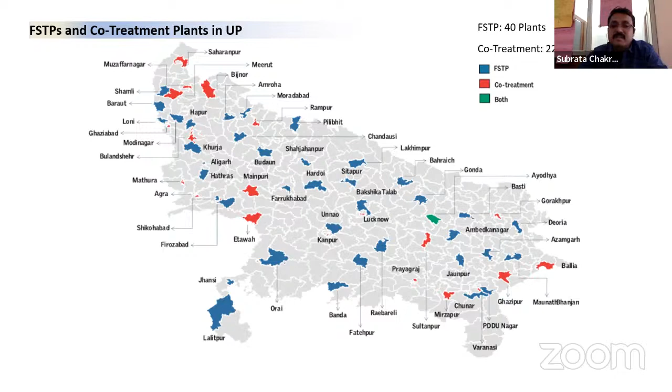Now, handover is an important aspect because AMRUT only funds the CapEx and a limited period of OpEx. Once this OpEx period is over, the plant is supposed to be handed over to the ULBs. We have an issue here because lots of cities are expecting guidance from the state, and the state is supposed to provide necessary guidance and a checklist on how to take this handover, because AMRUT provides funds to the Jal Nigam.

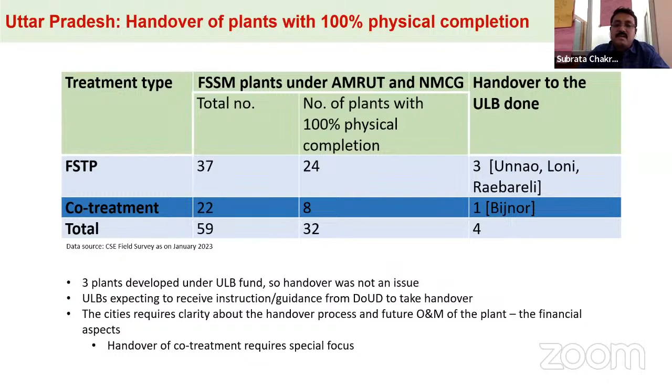Jal Nigam provides the construction through engagement of a contractor, and once this plant is built and operational for a certain time, it is supposed to be handed over to the ULBs. Now ULBs have to take care of the entire operation and maintenance of the plants. Out of 37 FSTPs, 3 have been handed over. This is January 2023 data; in between, some handover might have taken place, and out of the co-treatment plants, 1 has been handed over.

Next, distance: the plants have come up at various parts of the cities, at various distances. In less than 10-kilometer distance, there are 11 FSTPs and 6 co-treatment plants. Between 10 to 15-kilometer distance, there are 23 FSTPs and 11 co-treatment plants. And there are 5 FSTPs and 4 co-treatment plants at a distance of 15 to 20 kilometers. This is creating a problem.

The long distance of the plant from the city is creating a problem because private desludgers are not willing to take the sludge from households to the long-distanced plants. For all these cities within the 15 to 20-kilometer distance, the 5 FSTPs and 4 co-treatment plants need special care. We need to understand what the cities are doing there and how this can be managed.

Next, approach road is also an important part because all-weather roads are important to take the sludge to the FSTPs. There are small stretches, maybe 500 meters or 1 kilometer, of road that are yet to be built. We found good condition roads in 18 FSTPs and 13 co-treatment plants, which is 31 plants, so 31 out of 62, or 50% of plants.

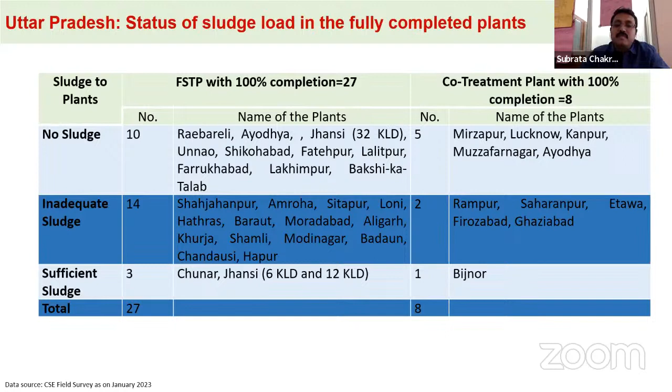So that's why we were saying sludge is the major challenge. For bringing sludge to the plant, one factor is distance, which we cannot change, but we can create a conducive environment by taking care of the approach road condition.

Now for the sustainability of the plants, what are the things important for the cities? Whether we have city level committees—because in UP the entire administration is heavily dependent on the executive officer or commissioner of the city—whether we can create a committee at the city level.

This committee will help in all sanitation related activities and also FSSM related activities. Many of the cities do not have bylaws. FSSM bylaws create a regulatory framework at the city level. Whether and how this is helping in 3 cities—Bijnor, Jhansi and Chunar—we can understand that.

And also, what can be done to ensure that adequate sludge comes to the plant? What are the various desludging models in towns?

Some of the towns have private desludgers only. Some have only government desludging machinery. And some towns have both private and government desludging machineries. So how can a model be created?

And who will be paying for this? Whether government will be paying the private desludgers, or households would be directly paying the private desludgers. What is the model? And how can citizens be engaged with the FSSM project, and what is the importance of that?

Because much of our effort goes into creation of infrastructure, but many times we forget creation of a conducive environment, engaging the citizen in the process.

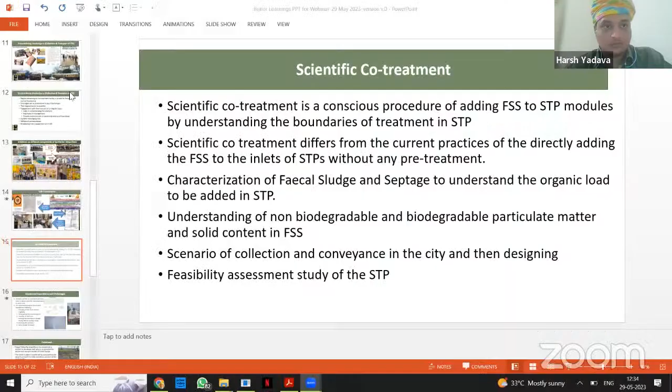Hi everyone, I hope my screen is visible to you all. Yeah, sure, Harsh.

So, hi everyone, I'm Harsh Yadava. I'm an employee of Center for Science and Environment, and I'm located in a city called Bijnor in West Uttar Pradesh. The city is a small city which is very close to the Ganga River.

Today I'll be sharing the experience of Bijnor city in dealing with fecal sludge and septage management. The idea was to implement fecal sludge and septage management in line with the City Sanitation Plan, which was prepared by CSE and endorsed by the Nagarpalika Parishad.

In my presentation, I'll share the city profile, what infrastructure was created to treat fecal sludge and septage, how interventions were done on various aspects of the sanitation value chain—containment, emptying, transport, and treatment—and what basic things were done to create an environment supporting the practice of fecal sludge and septage management.

And then why these desludgers are important, what roles they are doing in the sanitation value chain, and what are the current operational challenges at the plant, or what remedies or rectifications we have done in the city to improve on that.

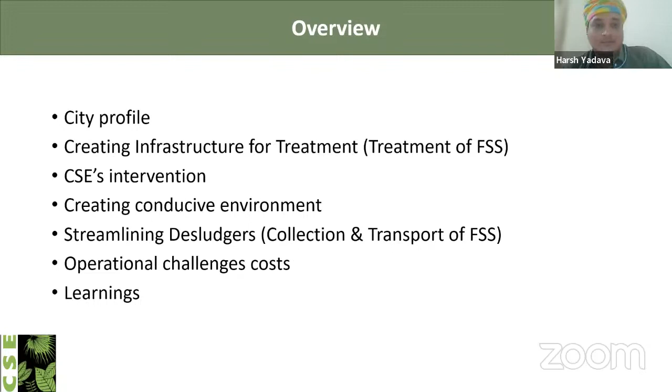The city is 12 kilometers west from River Ganga, and it's around 236 meters above sea level. The city achieved ODF status in 2018, ODF plus status in 2020, and ODF plus plus in 2021.

The city has a 24 MLD sewage treatment plant based on upflow anaerobic sludge blanket reactor, and it is receiving around 20 to 22 MLD of municipal sewage at the moment. On the premises of the 24 MLD STP, there is a 20 KLD co-treatment unit, which is receiving around 6 to 8 kiloliters of fecal sludge every day.

The city's population, according to the 2011 census, was around 93,000, but it has now increased as the city expanded its boundaries, going into Seema Vistar in 2020. So according to 2011 data adjusted, the current population is around 178,000, but if estimated properly, it's over 2 lakh. The area has increased from 3.6 square kilometers to 11.61 square kilometers.

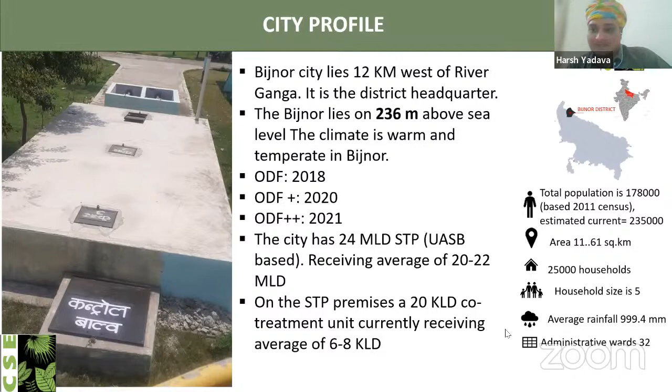Around 25,000 households are present in the total expanded area. Average household size is around 5 persons per household.

Talking about the treatment infrastructure, we have this co-treatment unit, which was constructed and commissioned in 2022. The total expenditure was around 41 to 42 lakhs. It is the first plant completely funded by Namami Gange to showcase how co-treatment can be done. The executing agency was the Uttar Pradesh Projects Corporation Limited, and technical support was provided by Center for Science and Environment.

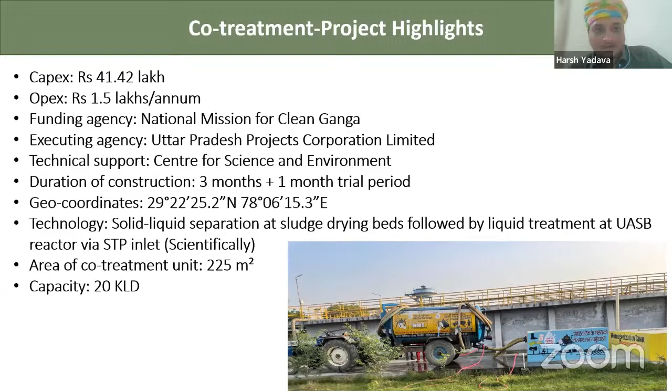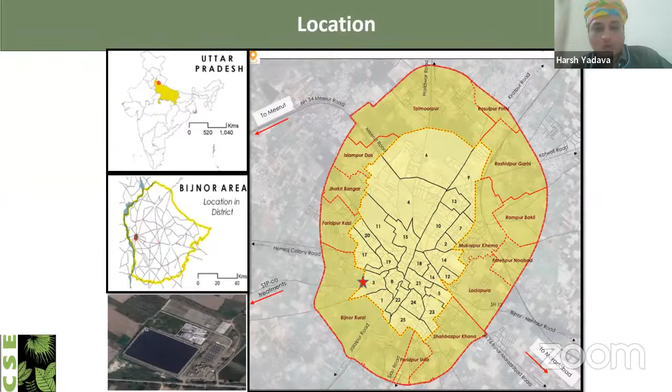It's around 1.5 to 2 kilometers from the city boundaries, in a village nearby.

The process for treatment of fecal sludge at the moment, introduced on the premises of the sewage treatment plant, works in this particular way. We have introduced the homogenization tank here, and fecal sludge is decanted at a screen chamber, from where it is transferred to the homogenization tank, where it is stored for 24 hours retention time, and then transferred to the sludge drying bed.

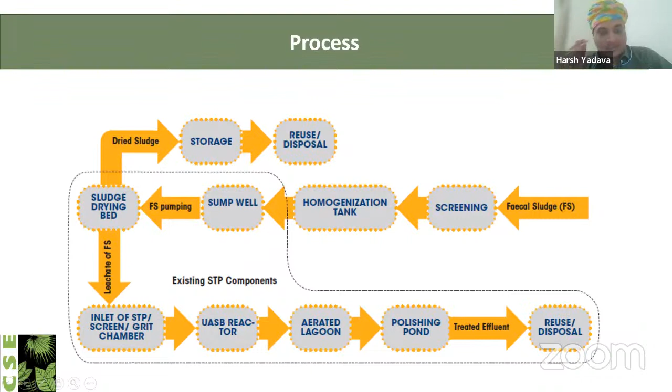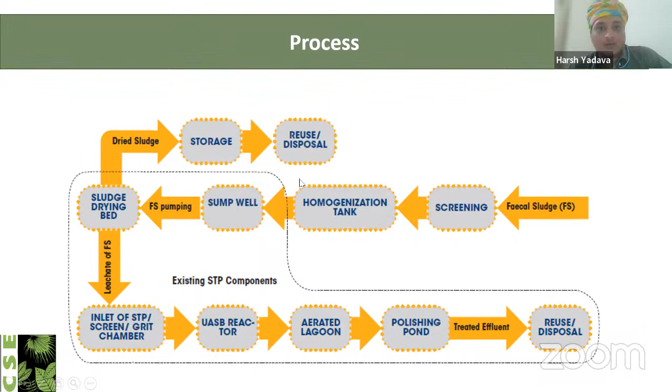The basic principle is that it allows for solid and liquid separation, which happens at the sludge drying bed area. Three things to notice: the introduction of new units in the vision of co-treatment were the screen chamber, homogenization tank, and the solar roof part of the sludge drying bed. The rest of the units were already present in the STP, so we cut costs here.

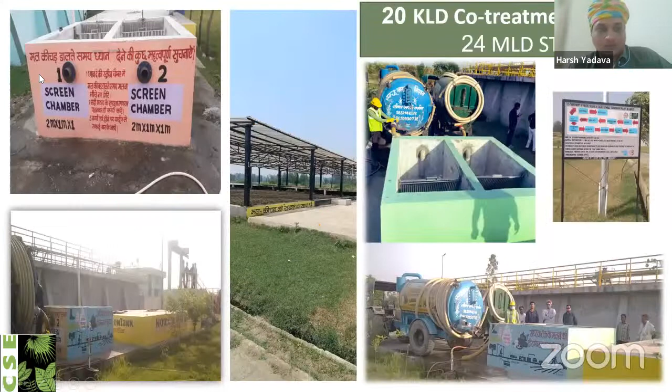These are the screen chambers, and this is the homogenization tank. You can see there is a roof over the sludge drying bed, which is also part of the co-treatment. This is the major place where solid-liquid separation happens, and then the liquid gets treated in the 24 MLD STP, while the solid part is dried, with drying expedited by this roof.

So talking about the environment, how we created things, how things happened smoothly, or what the challenges were, there are a few things I would like to tell you.

One was the city sanitation task force, which we created in 2018 in Bijnor city. That is a common point where all discussions regarding city sanitation and fecal sludge septage management were put forward and explained, or any issues and challenges were addressed. This is a multi-stakeholder and multi-sectoral body, including members of the urban local body and other stakeholders, for example desludging people involved in the desludging part, sanitation activists, and news agencies. All these were brought onto the same platform to discuss this issue of management of fecal sludge and septage.

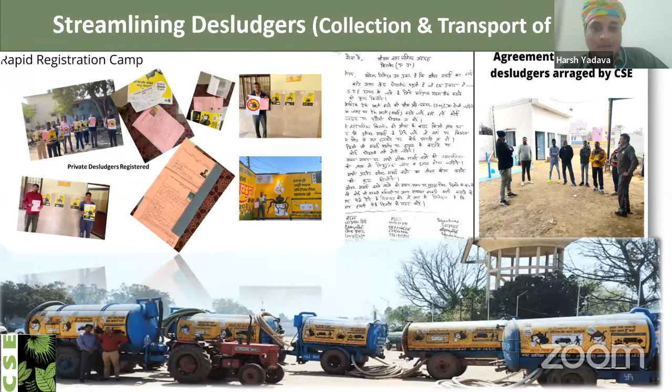And you can see the images of the licenses which were created to help them in the vision of regularization of these desludgers.

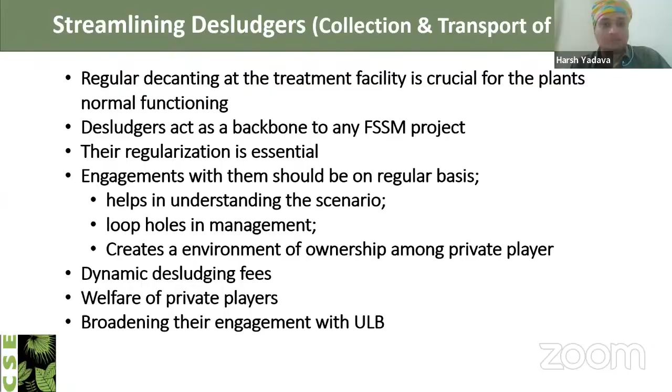Other than this, we also introduced them to different training modules on safe emptying and transport of fecal sludge. In these trainings, we helped them understand the importance of wearing personal protective equipment, what hazards fecal sludge can pose to their bodies, and how accidents can happen when it's mismanaged.

So these two trainings were done in Ghaziabad and Lucknow at different times. One was done in 2019, another was done in 2022. So the idea was to train these private players on this.

The other thing which we did was we also trained the local masons, because we are seeing fecal sludge septage management as a chain: containment, emptying, transport, treatment, disposal, and reuse. So if the containments are not constructed in the right way, then we are not getting the right product that is desired out of them.

So we also trained the local masons to understand how ideally we can design a septic tank, how ideally we can try and design a twin pit. And later this containment, you can see in the pictures above, the construction was done by these masons only, as a live example.

And later this site was renovated and used as an area to showcase to local citizens and to a person who is going for a new house or new building. They can take an example from here and follow the legal standard codes of construction of septic tanks.

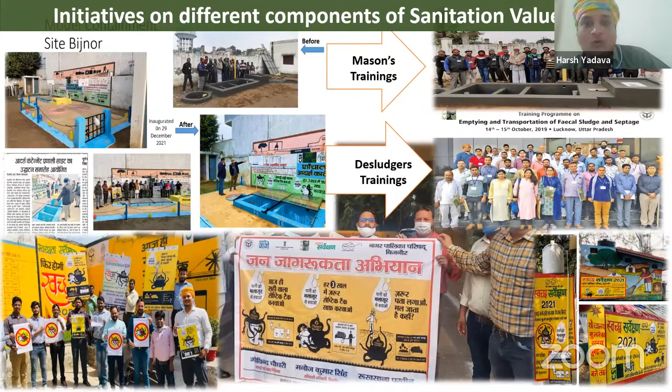Then another component which was very important was the bylaws. So these are the soft components which we worked on: fecal sludge and septage management bylaws for Bijnor city. In this case, the bylaws were framed and drafted with the help of Center for Science and Environment, and Nagarpalika Parishad Bijnor introduced these bylaws into the council and approved it in 2021.

But the good thing which happened was in 2022, when these bylaws got the gazette notification, and it was done in June 2022, Bijnor city was the first city in the state of Uttar Pradesh to take this step and bring it into the gazette notification of Uttar Pradesh.

But the work is not complete only by doing these soft aspects, only by regularizing the private desludging. We also need more and more fecal sludge. Currently the plant is running on demand. So how do we monitor, how do we make them feel that they are doing good work?

So Bijnor Nagar Palika Parishad came with a scheme called incentive scheme for desludging. The more you desludge, the more will be the reward you'll get. So in this case, the executive officer of Bijnor Nagar Palika Parishad told these private players to bring more and more sludge to the treatment plant, and they would be rewarded every 3 months or so.

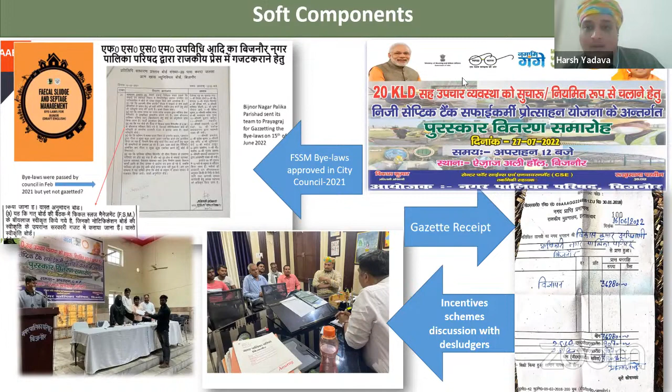So this scheme was really helpful in starting the plant and starting the work there.

So these were some aspects on the desludgers. Now what is needed for the plant to run in a smooth way? One is to take the handover as soon as possible.

Take ownership of the plant, because this plant is helpful to your city. So Bijnor Nagar Palika Parishad did no delay. As soon as the plant was ready, they proactively worked with Center for Science and Environment to understand the basic challenges when dealing with fecal sludge, and understood the dynamics of the plant, and took the handover in 2022, just within 1.5 to 2 months of the plant being ready.

Now, if we want to understand the cost incurred during operation and management, this is co-treatment, 20 KLD per day. In this we have the screen chambers, the homogenization tank, and the sludge drying bed. So basic things include cleaning of the steel screens installed at the plant, maintaining a record register, and transfer of fecal sludge septage from the homogenization tank to the sludge drying bed. This is the basic operation part.

So Bijnor Nagar Palika Parishad employed a new worker to do all these tasks, and currently he is responsible for regular cleaning of the premises, regular cleaning of the screen chambers, and transfer of the homogenized fecal septage to the sludge drying bed at an interval of 24 hours. Basic retention time is 24 hours.

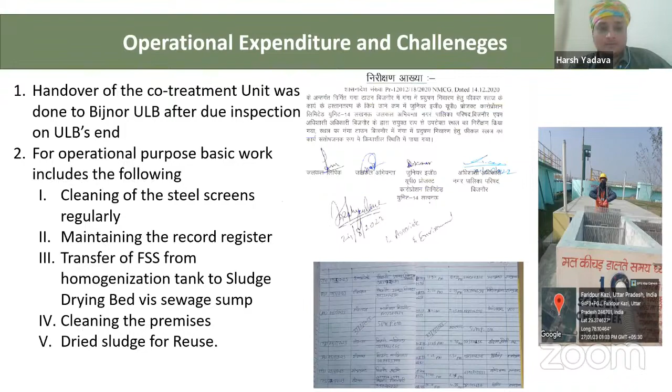The other part involves reuse - how this dried fecal sludge, which you can see on the right side, can be transferred in the best way for reuse. This includes some extra costs. One cost is the salary of the worker who works regularly at the plant, and the other is the periodical work that happens once a month when the drying beds are emptied and cleaned.

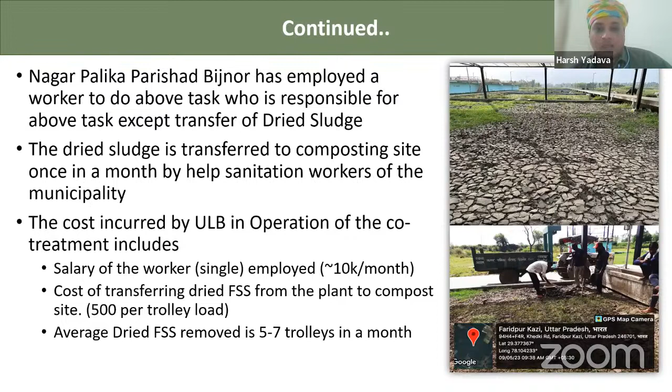So labor from sanitation workers, a group employed by the urban local body, come to remove the fecal sludge from the bed and take it to the Gaushala, where they mix this dried sludge with the manure created there. Almost 500 rupees per load is being taken on the trolley, and the salary of the worker is around 10K per month. This is the average cost being incurred.

So these were a few things I wanted to explain around operation, cost, and maintenance. Basic learnings we have understood during implementation of the plant - we need to ensure that while we are doing FSSM, it should be done as soon as possible. That is, maximum safe management of fecal sludge and septage - we need to start it as soon as possible.

So for that, we need to do handover as soon as possible and start working so that sludge emptied from a septic tank or pit is reaching the treatment plant. Then regularization and engagement with private desludgers - we should also start as soon as possible. As you can see from the example of Bijnor, it was done from the very early stages. So it is very important, as early engagement also brings understanding and trust between the city officials.

Since Bijnor Nagar Palika Parishad had started very early to deal with the desludgers, they have good coordination between them. Once they give a call to them, everybody is there and present in the meeting. So it helps them.

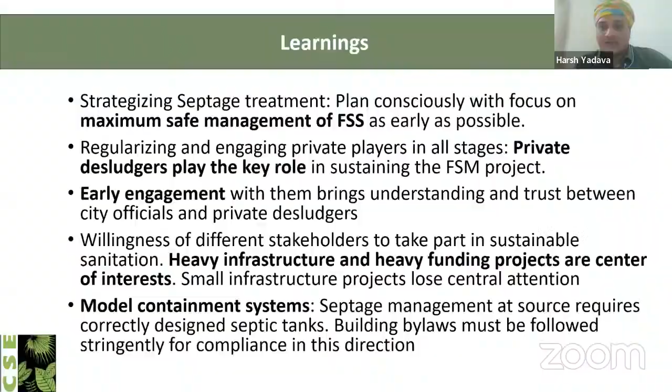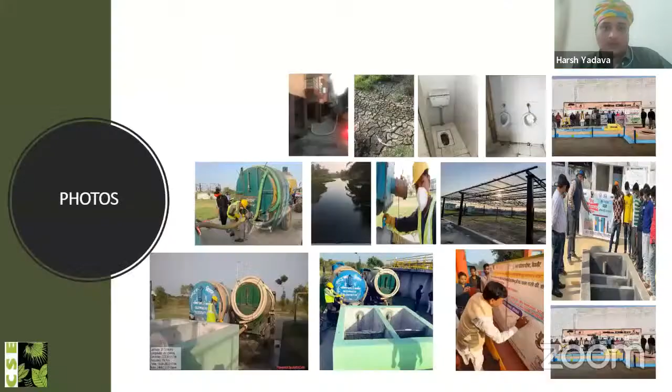Please, so these were a few things I wanted to tell you. Lastly, we have just recently achieved recognition from Swachh Bharat Mission Gramin Rajasthan, who came to give an exposure visit to our plant and appreciated the work being done. So these are a few photos of the plant. Thank you.

Till now, Harsh has explained how we have operationalized the co-treatment plant in Bijnor. Now we'll see in a similar manner how Jhansi has operationalized septage management in their town.

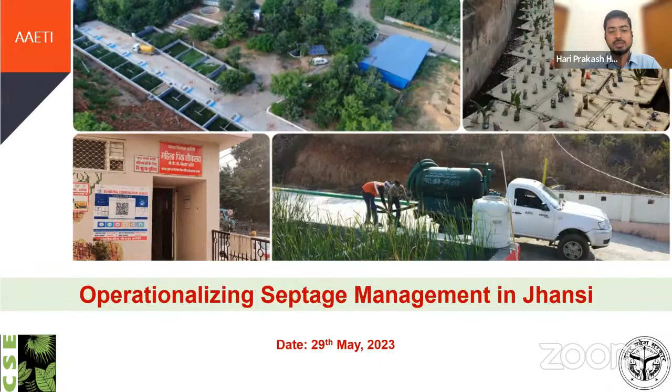Jhansi is one of the biggest towns in the southern UP area, situated near the Pahuj and Betwa rivers. Jhansi lies in the Bundelkhand region, dominated by mountains and hilly areas, so laying an underground sewage network becomes very difficult. It's not impossible, but very difficult - the cost becomes two times higher and it is very time taking. That's why Jhansi started exploring other options for liquid waste management in the city.

Jhansi was dominated by septic tanks designed very oversized, with emptying cycles very high - 5 years, 10 years, even 15 years in a few cases. So if you see, till 2018 the septage being emptied from these septic tanks was discharged into the Pahuj River, which eventually reaches the Ganga through the Yamuna River - again causing water pollution and contamination of a major river of India.

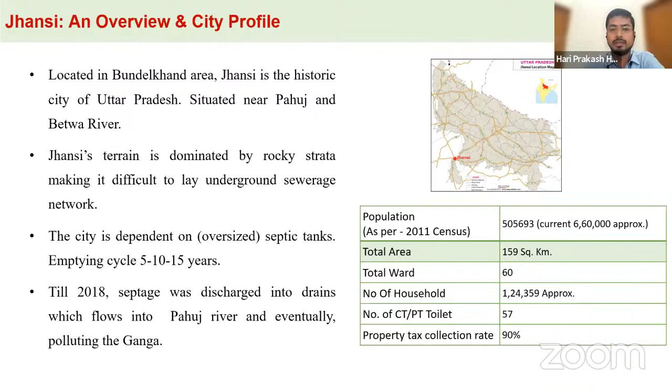On the right side we can see the population - Jhansi is a medium town city with a population of around 6.6 lakhs. Jhansi has a very good property tax collection rate of 90%, which is pretty high in Uttar Pradesh. So in search of exploring suitable options for a medium town city like Jhansi, what they can do...

They started exploring for septage management, visiting different FSTPs constructed in India like Devanahalli and other places. Jhansi was the first city in UP to draft bylaws in 2017, and with that they started construction of a 6 KLD fecal sludge treatment plant, funded by the 14th Finance Commission fund given by the central government. Construction took around 6 months and it was ready by 2018 and became operational.

Jhansi Nagar Nigam operated this plant with the help of a private operator for 3 years, then further expanded in 2021 by another capacity of 12 KLD. So earlier the capacity was 6 KLD in 2017, and by 2021 another 12 KLD capacity was added, making it 18 KLD. Running it for 2 more years, another fecal sludge treatment plant was constructed under the AMRUT mission, of 32 KLD.

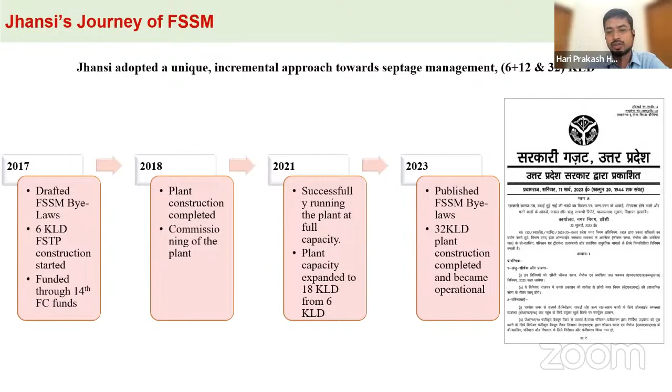So Jhansi has taken a very unique, incremental approach - instead of directly constructing a very big FSTP of say 50 or 100 KLD capacity, they started with a smaller capacity, tried and experimented with it, learned how to manage desludging services for that 6 KLD plant, then further expanded, and later expanded again to 32 KLD. They also gazetted the bylaws to further streamline the process in 2023. This is a very unique case in Uttar Pradesh, and I think in India also, where this incremental approach has been taken up.

This is the picture of the treatment plant. On the right side near the truck, you can see 6 boxes - this is the old 6 KLD plant. On the left side the 12 boxes are there, which were later added in 2021.

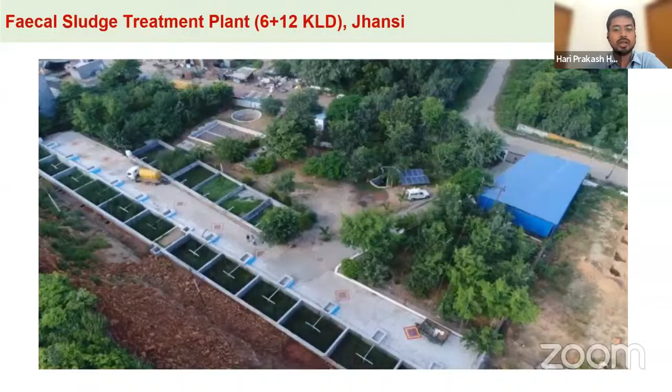It works on a completely nature-based system. First it's collected from households, transported to the fecal sludge treatment plant, and discharged into the planted drying beds. From there, the solid retains in the PDB while the liquid goes into the DEWATS for further treatment, followed by the planted gravel filter, and at the end to the polishing pond for removal of pathogens. The solids from the planted drying bed are removed every 1.5 years as per requirement.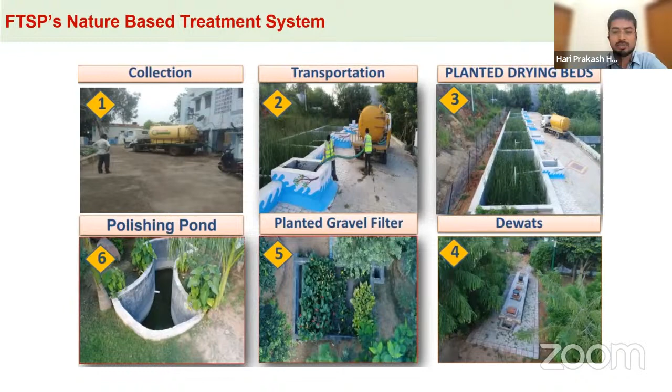They focused on a nature-based system, which requires low operation and maintenance, low electricity requirements, and the plant also has a solar panel system. So in short, the plant uses completely zero electricity for the treatment of septage.

Till 2015, the desludging services were provided by the government due to the absence of a private operator. To provide better services, the desludging services were contracted out to a single private operator in 2015 - Purna Pro Enviro - which provides these services within the city through vehicles of 6 KL and 2 KL capacity. The vehicles were owned by the government but operated and maintained by the private operator.

Since the completion of the FSTP in 2018, all septage emptied from septic tanks is discharged into the treatment plant. The same private operator providing desludging services also operates and maintains the fecal sludge treatment plant, which is a 6+12 KLD plant. In 2023, another 32 KLD plant was constructed, and with that, 2 more vehicles were added in the Nagar Nigam for providing desludging services.

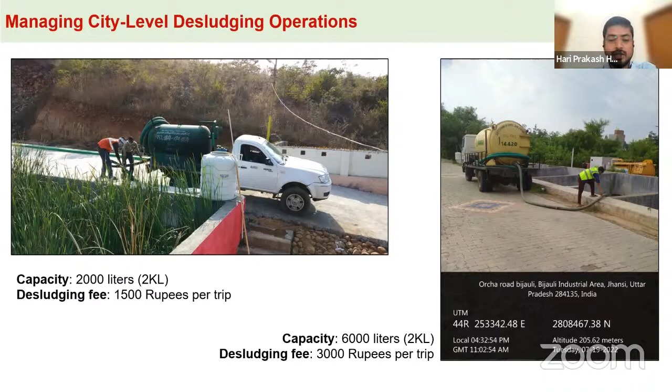Further, as we move in the desludging operation, record keeping becomes very important. The private operator providing services within the municipal corporation area provides a monthly summary sheet at the end of each month to the corporation, giving the idea of how many septic tanks were emptied - the public tanks and also the government septic tanks.

For the month of February, the public tanks emptied were 72 trips, and the revenue generated from them was 1.74 lakhs. The service provided to government septic tanks were 25 trips, and the revenue generated is 0 rupees - we'll go deeper into that in a while.

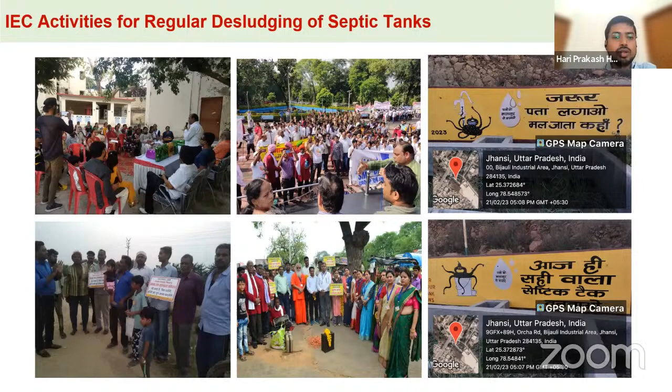The Jhansi Municipal Corporation is continuously engaging with citizens through Jan Sabha, focus group discussions, public rallies, and signboards, to make them aware about regular desludging - the benefits and what harms it could lead to in terms of groundwater contamination, all those things. Citizens are made aware about all these aspects through regular IEC campaigns.

So this was more of the emptying and collection part. After emptying, the septage is transported to the fecal sludge treatment plant, operated by the same private operator. At the plant, there are 6 staff members, and the operation and maintenance is done by the private operator, but under supervision by the Jhansi Nagar Nigam. There's a designated officer - the zonal sanitary officer - who looks after all the operation and maintenance of the fecal sludge treatment plant.

They also do periodic testing of the treated products - all the treated water and the biosolids they are generating - to check if it meets the given criteria by the CPCB, or where is the lag and how they can improve.

All the operation and maintenance cost of desludging services is being generated by the private operator through desludging fees. And the operation and maintenance cost of the fecal treatment plant is completely borne by the municipal corporation.

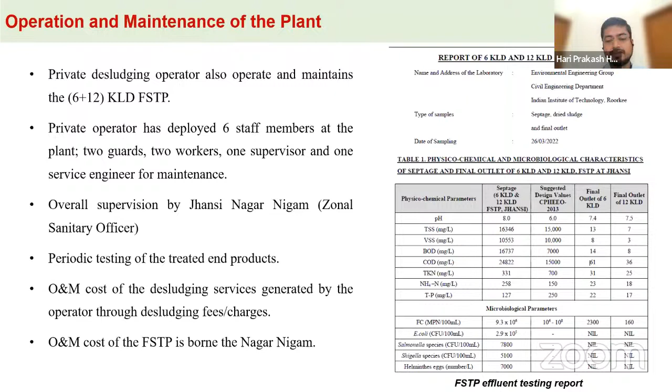The treated products generated from the fecal treatment plants include biosolids. Recently, the corporation has installed a crusher machine to convert the biosolids into a fine powder form, using solar panel generated electricity. They have partnered with a local NGO for the reuse of biosolids in gardening areas, and the biosolids are being sold at the rate of 32 paisa per kg.

The treated water which is being generated from the plant is being reused in the cleaning of roads through mechanical vehicles and the gardening of the parks of the municipal corporation.

So if you see, be it reuse of treated water, reuse in the parks, or the desludging services, there is a higher utilization rate of the plant. All this has been possible because of a lot of effort from the municipal corporation and engagement with the ULB and the citizens, which was very crucial. Also, the plant location was very strategically located, so it is within the reach of the city. If the plant had been at a distance of 15 to 20 kilometers from the city, it would have been very difficult to get the sludge to the plant, or to reuse the treated water for road cleaning within the city. So all those aspects are very crucial at the planning stage itself.

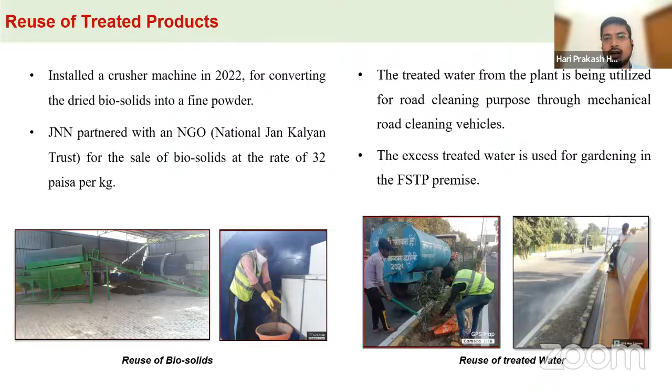So till now we have seen how the user interface is in the city, how emptying and transport is being managed, about the treatment part, and also about the reuse of the treated products, be it biosolids or the treated water.

Now we will take a quick look at the financial model and how it works within the city between different stakeholders. Desludging services and the fecal treatment plant operation and maintenance is being provided by one private operator, Purna Pro Enviro Private Limited. They also sell the compost generated from the plant.

The desludging services are completely funded from the desludging fees generated from the emptying of septic tanks of property owners or users.

The operation and maintenance cost of the treatment plant is funded through the municipal corporation, costing around 6.2 lakhs per month, which comes completely from the municipal corporation's own fund, not from grants, SFCs, or CFCs. As mentioned earlier, Jhansi has a very good property tax collection rate, and this has been possible because they have a better institutional mechanism at the city level. It is also partly funded from the revenue generated from the sale of compost.

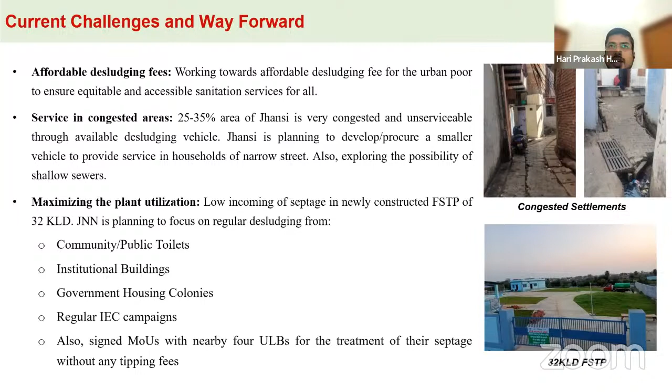There are institutional buildings, and like in most cities, government housing colonies. Jhansi Corporation is focusing particularly on these three aspects, to maximize the incoming sludge to the 32 KLD plant through regular IEC campaigns. They have also signed MOUs with nearby ULBs within a reach of 20 to 30 kilometers, accepting septage from them without any additional charges.

This is just a glimpse of the achievements. They have been given the Best Innovation Award in Swachh Survekshan in 2019, and also achieved 3rd position in ODF++ in 2018.

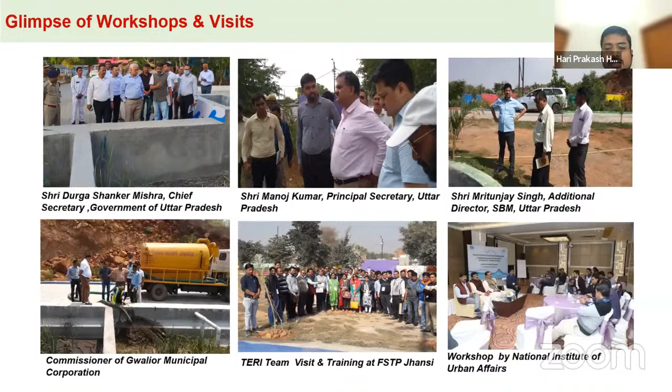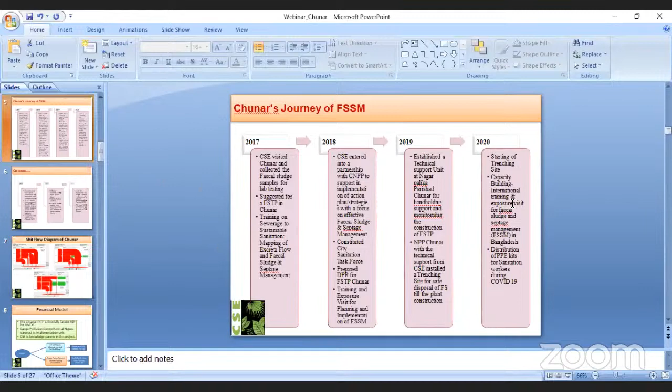In 2020, CSE along with Nagarpalika Parishad Chunar started a trenching site for safe disposal of fecal sludge until the fecal sludge treatment plant started. In 2021, construction was completed and soft commissioning executed. A 3D model was prepared by CSE and given to Nagarpalika Parishad Chunar for IEC purposes and to help people understand the fecal sludge treatment plant. In 2021, CSE also conducted a household survey throughout the Nagarpalika Parishad Chunar boundary. In 2022, official commissioning was done and operation and maintenance of the plant started. A small vacuum tanker was also purchased by Nagarpalika Parishad Chunar to cover narrow lanes. Then in 2023, Honorable Mr. Swatantra Dev Singh, Minister of Jal Shakti, inaugurated the fecal sludge treatment plant in Chunar. Till now, 5.6 million liters of fecal sludge have been treated at FSTP Chunar.

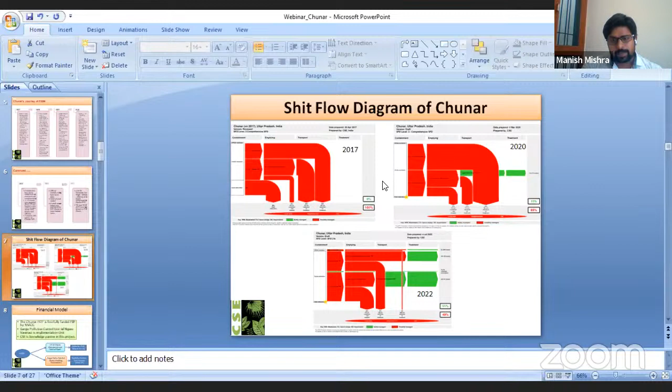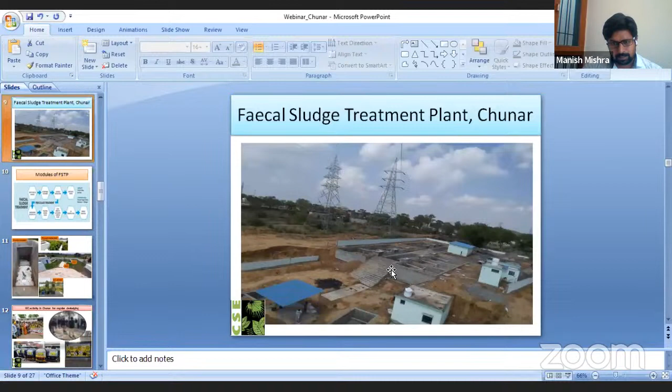So this is the fecal sludge treatment plant. This is a picture taken by drone during the construction.

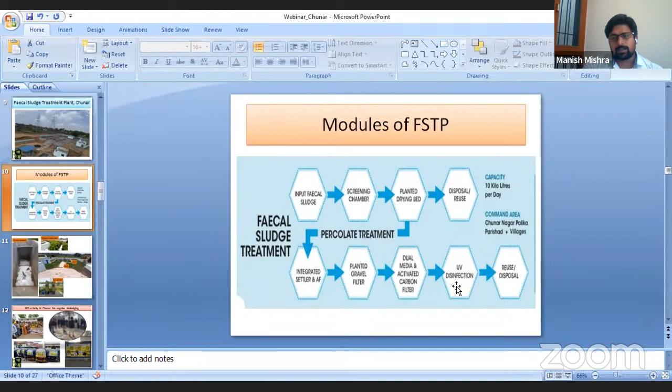In Chunar fecal sludge treatment plant, the modules are: screen chamber, planted drying bed, integrated settler and anaerobic filter, planted gravel filter, dual media filter, and activated carbon filter. Then we use UV disinfection for further treatment, for tertiary treatment.

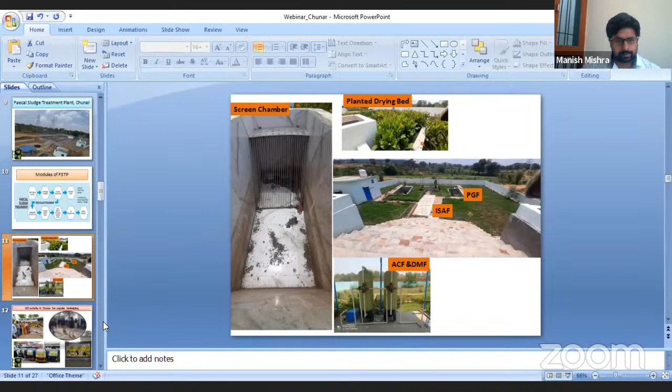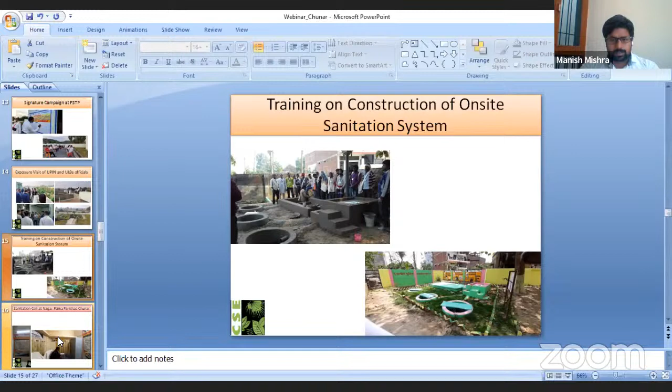For masons, as my colleague Harsh already mentioned about masons training, we have conducted masons training in Chunar as well. We have also constituted a sanitation cell which works dedicatedly on fecal sludge and septage management in Chunar.

When we talk about desludging activity in Chunar, till 2020 the government desludging fee was 3,000 rupees, which was very high for Chunar people. However, private operators were desludging at only 1,800 rupees. So till 2020, Chunar people used to call private desludgers for emptying their tanks. But in 2021, after sensitization of Nagarpalika Parishad, the desludging fee was reduced to 500 rupees, which was remarkable. And in Chunar, private desludgers stopped providing desludging services.

The sanitation cell regularly makes calls to households for desludging septic tanks, and also motivates household owners for regular emptying of their septic tanks. Nagarpalika Parishad Chunar has 2 vacuum tankers: one of 3.5 kiloliter capacity and the other of 1 kiloliter capacity. The 3.5 kiloliter tanker is a big one which cannot cover narrow lanes, so to cover narrow lanes, Nagarpalika Parishad Chunar purchased a 1 kiloliter capacity vacuum tanker.

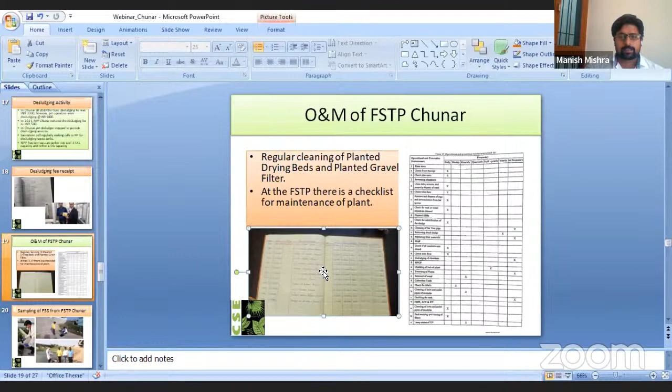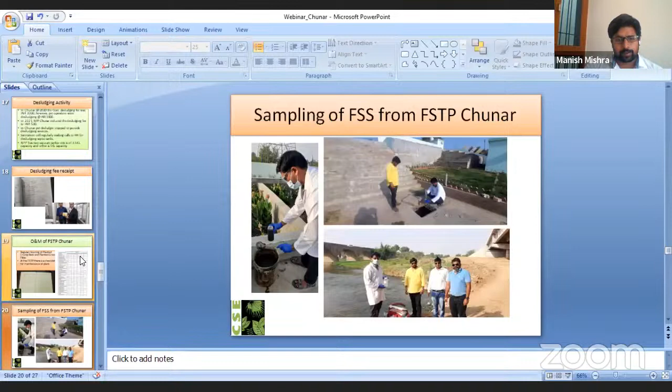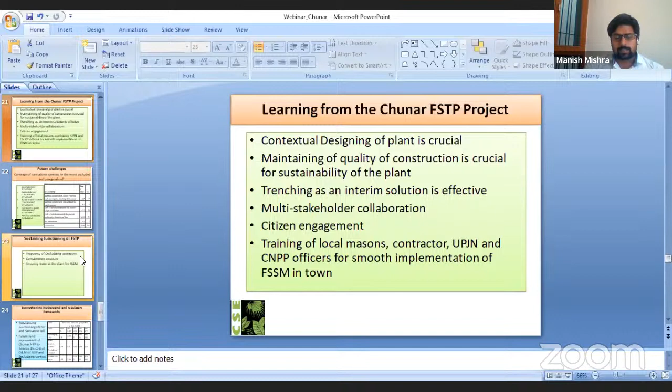Learnings from the Chunar project: contextual design of the plant is crucial. We have to ensure which type of technology will suit the individual city. Maintaining quality of construction is crucial for sustainability of the plant. Trenching as an interim solution is effective. Multi-stakeholder collaboration is very important. Citizen engagement is very important for implementation of fecal sludge management throughout the city. Training of local masons, contractors, UP Jal Nigam engineers, and Nagarpalika officials is also needed.

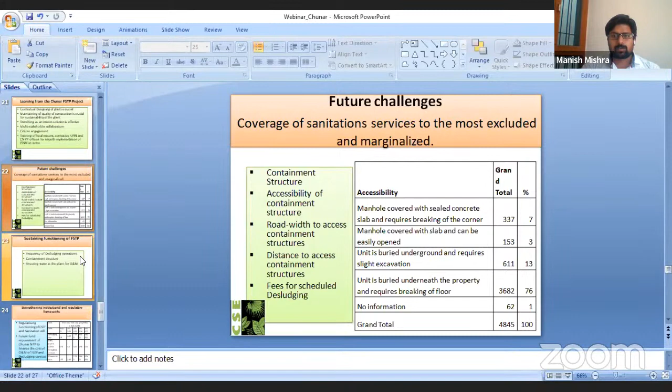Future challenges include coverage of sanitation services to the most excluded and marginalized society, and sustaining functioning of the FSTP. We have to work on increasing the frequency of desludging operations, containment structures, and ensuring water at the plant for operation and maintenance.

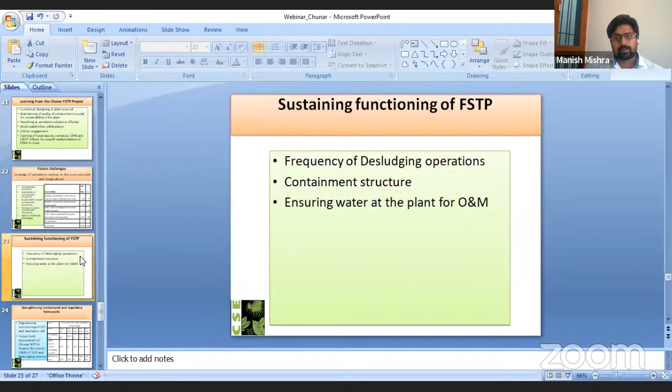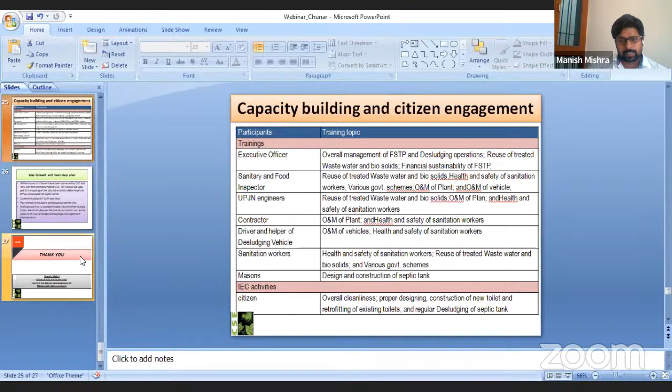For sustaining operations at the FSTP, we have to strengthen institutional and regulatory frameworks. We have to do capacity building and citizen engagement, and trainings for individuals like UP Jal Nigam engineers and Nagarpalika Parishad officials.